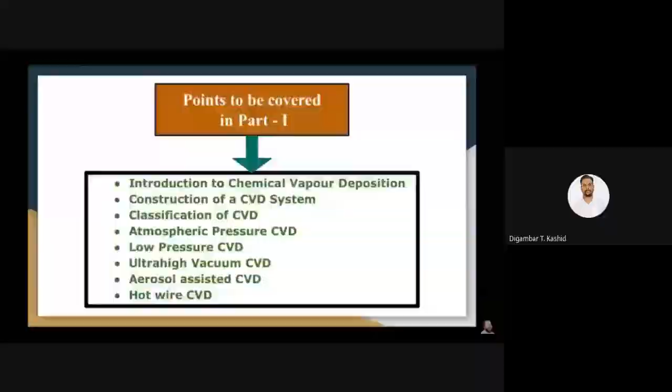So for this topic I have made two parts. In part one we discuss the introduction to chemical vapor deposition process, then construction of the CVD system, classification of the CVD system, and then the types of this CVD system one by one. Let us begin with the first point.

Deposition is deposited from a vacuum, from a vapor, by a chemical reaction occurring on or in the vicinity of a heated substrate. So whatever I explained already in physical vapor deposition, we create certain molecules, atoms, or plasma, and then deposit those onto the substrate. But in chemical vapor deposition we make certain gases or materials which react with the substrate itself to make the coating.

So the resulting solid material is in the form of thin film, powder, or single crystal. We can get the modification by this technique or this way. So what are the key factors in the CVD system?

The first one is substrate material, which we are going to coat or modify. The next factor is substrate temperature: what temperature it can sustain, or what temperature I can put my substrate at so that it will not change any of its properties, physical or chemical.

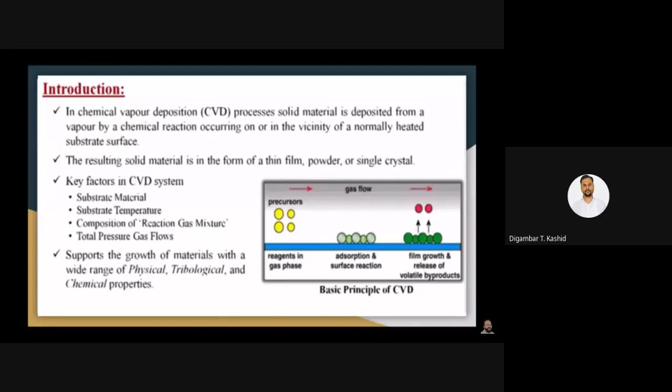From this diagram shown in the slide, we can understand there are certain precursors, which are reagents in gas phase, then the gas flows, then there is adsorption and surface reaction taking place with the substrate itself, and then the film grows on the substrate material, releasing volatile byproducts - maybe some toxic or other gases - which come out from the surface. So we get a uniform material coating onto the top of the surface. This is the general idea about the chemical vapor deposition process.

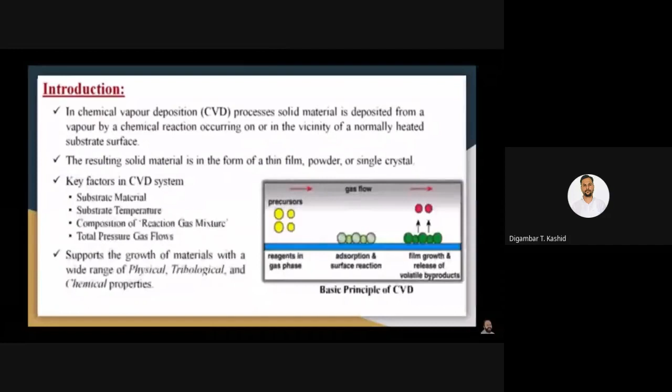Let us move to the construction of the CVD system. What are its parts? First we have the reaction gas dispensing system.

In the diagram I have shown the reaction dispensing system. After the reaction takes place, all the products pass through these channels or dispensing systems, because we have certain flow meters, gas bottles, the sublimator, the generator, and the evaporator.

The thing is that when mixing is taking place, if there is any humidity, it can remove that humidity. If there are impurities, it can subtract those impurities. Not only that, there is a flow meter by which we can control the flow onto the system itself.

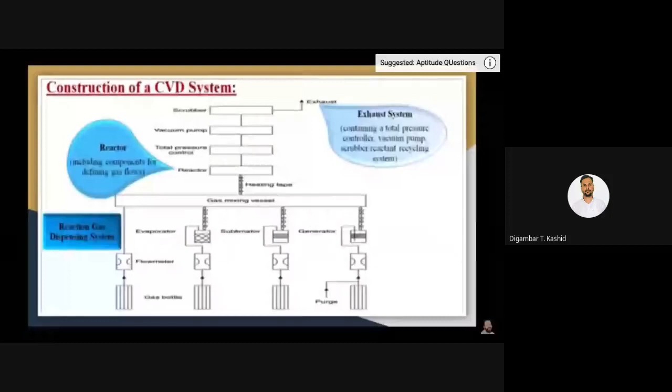We fix it onto the substrate or the system. Then we have some kind of reactor, as shown here, which includes components for defining the different gas flows, so we can put gas into the system and do the mixing automatically. We can control the percentage of gas mixing and agitate the gas as well. Also, at the top we have an exhaust system containing a total pressure controller, vacuum pumps, scrubber, and reactant recycling system.

Whatever impurities, moistures, or other means that are not required for this particular action can be taken out and thrown outside by this exhaust system, as shown here.

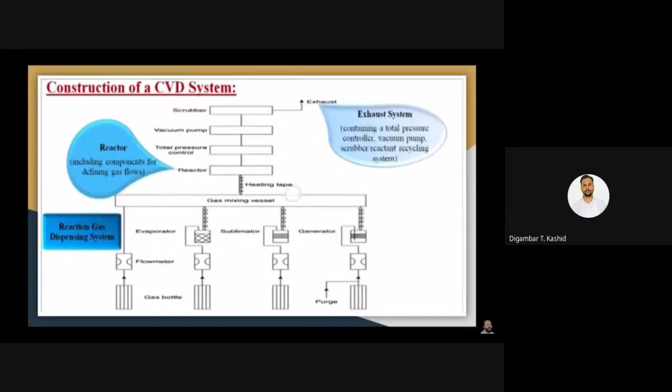Now let us move to the next point, where we discuss the different types of CVD process. These CVD deposition processes are classified according to the following criteria. The first one is energy source and activation.

Look at the energy source and activation types: rapid thermal CVD, in short RTCVD, then hot wire CVD, photo enhanced CVD, laser induced CVD, plasma enhanced CVD, and high density plasma CVD. From this, you can understand that all come under the CVD process, but only the energy source is different. Somewhere we use electrons, somewhere photo or light, and somewhere thermal source.

Next we come to the substrate, which may be non-porous or porous, whatever material we are going to use for doing the modification.

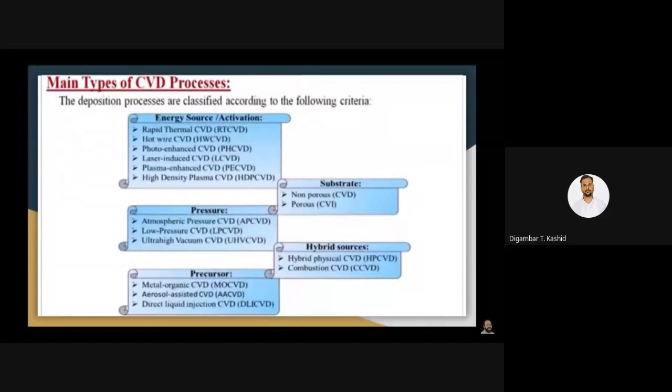So these are the different types of CVD. Let us discuss these types one by one. The first one is called atmospheric pressure CVD, in short APCVD, process at atmospheric pressure. From the name itself, you can understand that we maintain atmospheric pressure for doing this particular CVD process.

The reactor designs provided a high deposition rate, typically at 400 degrees centigrade, giving films in the range of 100, 2000 to 3000 angstrom per minute. That is the controllable limit, and we can go up to 400 degrees centigrade, so if our material is less than that temperature, it works for the substrate.

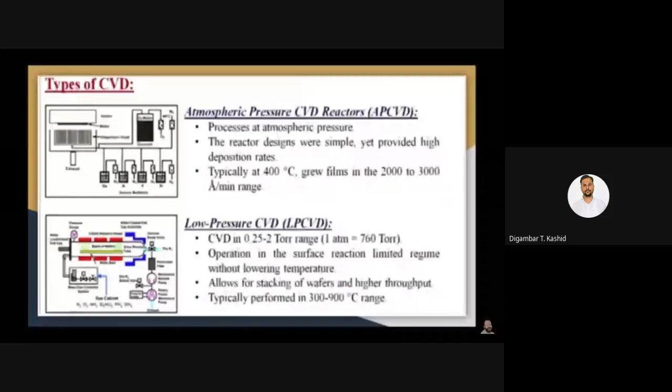The next is called aerosol assisted CVD, or AACVD process. Here precursors are transported to the substrate by means of a liquid or gas aerosol. We are not going to use any kind of carrier gas here, rather it is carried out by some kind of liquid or gas aerosol.

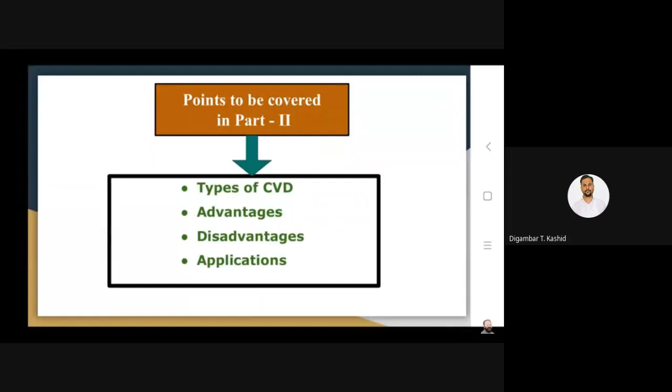Next is photo enhanced CVD, or in short, PHCVD process. It is based on activation of the reactants in the gas or vapor phase by electromagnetic photon energy. The reactant molecules or atoms initiate the process, and low temperature, generally 150 degrees centigrade, is needed to form films like silicon dioxide, which greatly minimizes the...

Then a UV source is used, which emits UV lights, and then we are plunging some kind of carrier gas. That carrier gas reacts with the UV rays, and then they form a certain kind of material, which is then deposited onto the substrate itself.

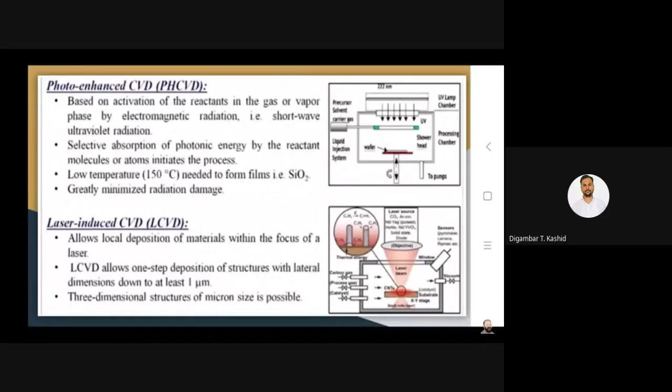You can understand that we have given an example of CNT, carbon nanotube. So any kind of laser source can be taken, which is put in place, and there are several inlet channels where we are plunging the carrier gas and different gases with which we can react properly. Through this laser, these gases will be agitated, and they will form a certain kind of new material which will be deposited onto that carbon nanotube.

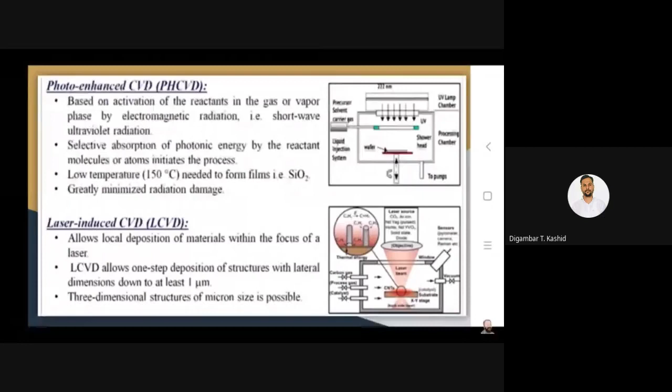Now let us go to the next one, direct liquid injection CVD. Here, liquid or solid dissolved in a convenient solvent liquid solution is injected in a vaporization chamber toward the injectors, typically like a car injector. Then the precursor's vapors are transported to the substrate using a classical CVD process.

The simple idea is that a car injector is nothing but where the fuel is directly coming and injected into the engine itself. So we are using a certain kind of injector there, continuously injecting the oil and air mixture and continuously burning it. The same thing we are doing here also.

So we have some kind of pressure tanks where we put a certain gas pressure. Due to that gas pressure, the liquid goes into the atomization process, or generally we call it an atomizer. There, a high pressure of air is given, due to which the liquid forms small bubbles, and then those small bubbles directly become a vapor, which is deposited onto the metal surface, and the rest of the vapor goes throughout the chamber.

Now let us discuss the next one, metal organic chemical vapor deposition. It is based on metal organic precursors used to produce single or polycrystalline thin films, a highly complex process for growing crystalline layers. Pressure is generally 10 to 760 torr, and this technique is preferred for thermodynamically metastable alloys. Here we generally use certain metal precursors, and we need a high energy source. Then the material we are going to deposit is shown in the figure also.

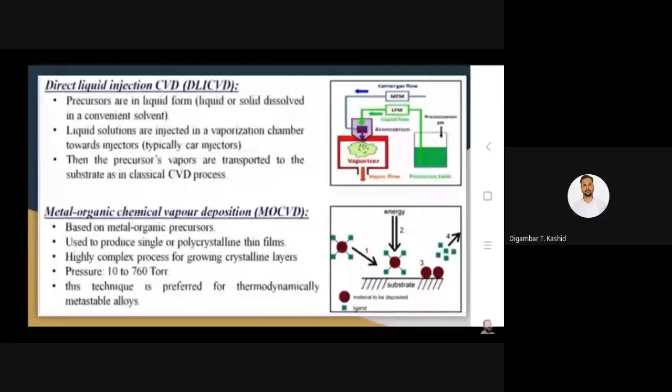Let us start the technology, that is CVI, chemical vapor infiltration. This is the latest technology. CVI means the chemical vapor infiltration is a ceramic engineering process whereby matrix material is infiltrated into fibrous preforms by use of reactive gases at elevated temperature to form a fiber reinforced composite. So not only can you do coating of a particular material, you can do coating of particular composites too. The earliest use of CVI was the infiltration of the fibrous alumina with chromium carbide. CVI can be applied to production of carbon-carbon composite and ceramic matrix composite.

A similar technique is the chemical vapor deposition process. The main difference between CVD and CVI is that in CVD process, hot bulk surface is used, while in CVI deposition process, a porous substrate is used. So that is the basic difference.

From this particular case, you can understand that at the inlet we are putting the chemical carrier gas and the reactant material. Then the carrier gas is going through this fibrous material, and the molecules react inside, and some molecules along with carrier gas go out. That means the carrier gas can easily go inside the porous material, and the molecules of that reactant material can be absorbed inside the pore itself. Some molecules may come out with the carrier gas. So this is how we do the CVI infiltration process.

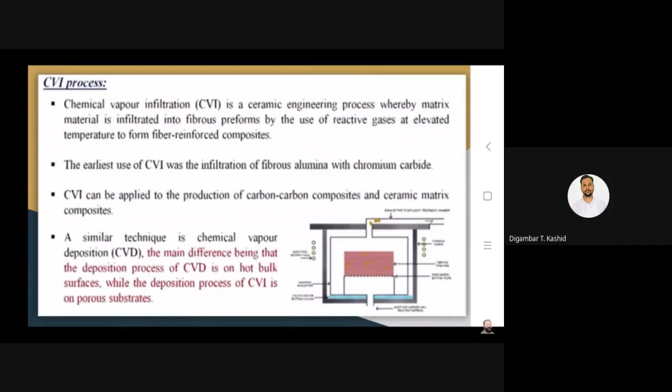Here we are doing the infiltration of particular molecules inside the material.

Now next, hybrid physical CVD process. This vaporization process involves both chemical decomposition of precursor gas and vaporization of solid source. The main difference between HPCVD and other CVD is that in the heating unit, both substrate and solid metal source are heated up by the heating module.

Now, rapid thermal CVD process. This only heats the substrate rather than the gas, which helps reduce the gas phase reactions, and that can lead to particle formation. So far we were agitating the reactant material and the gases. In this particular case, the substrate itself becomes reactive, so that it can react directly with the gases and form any kind of layer, powder, or coating onto it.

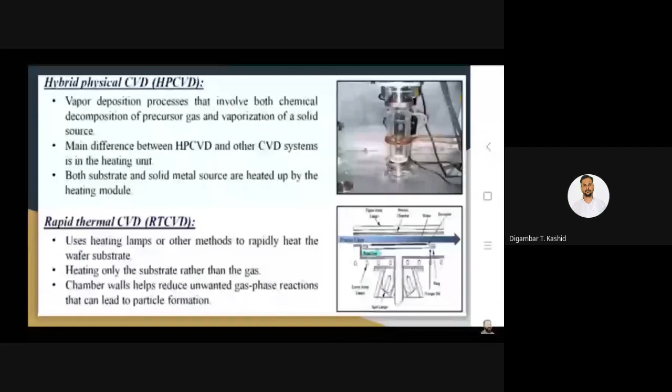That is the plasma CVD process. This is also a latest technology, and this equipment is very expensive. LPCVD with plasma source supplies energy to the reactant gas, and we have to keep lower deposition temperature around 200 to 350 degrees Celsius, which is good for films more sensitive to temperature. So this is all about the plasma enhanced CVD process.

Let us discuss the next one, called high density plasma CVD - plasma enhanced CVD with very high density plasma. The density of plasma is more, with RF bias on substrate. It has a lower deposition temperature, generally 20 to 150 degrees centigrade, much lower pressure, generally 1 to 10 mTorr required, and gives better quality films with fewer defects. So this is a more sophisticated machine than the plasma enhanced process.

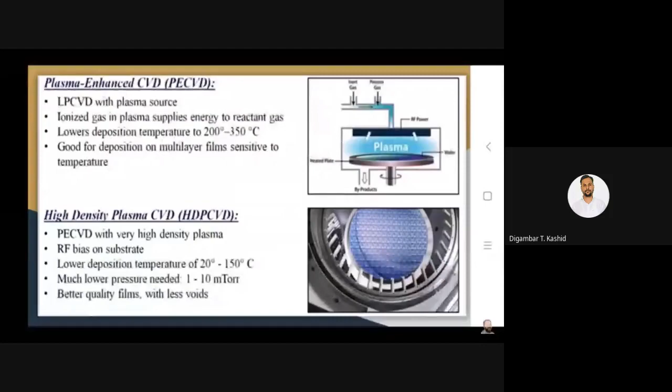The next one we are going to discuss is combustion CVD, or CCVD process. This is divided into 4 parts. It has the ability to produce thin film in the open atmosphere using vapor precursors, or inexpensive precursor chemicals in solution. Generally, like painting, we use this kind of technique.

First one is called solution preparation. This is the first step, starting with precursor of metals dissolved in a suitable aqueous or organic solvent. So here we are putting the solution, and this solution is pumped into a particular nanomizer or gun, which is going to spread the material onto the surface itself.

Then in the meantime, we use a certain kind of filter, because there may be some impurities, some humidity, or certain water molecules that can be absorbed directly, so that the solution in dry form will go directly to the nanomizer. And in this particular case, we are doing the atomization of that particular gas - what is called atomization, or atomizing gas.

The solution is delivered by means of a pump to a proprietary atomizer where it is converted into submicron droplets. Here we are giving high pressure gases, so through these gases, these solutions in liquid form are coming into small bubble form, and then directly through this film structure, giving certain kinds of combustion at that particular junction, and then that film is falling onto the substrate making a certain kind of coating over there.

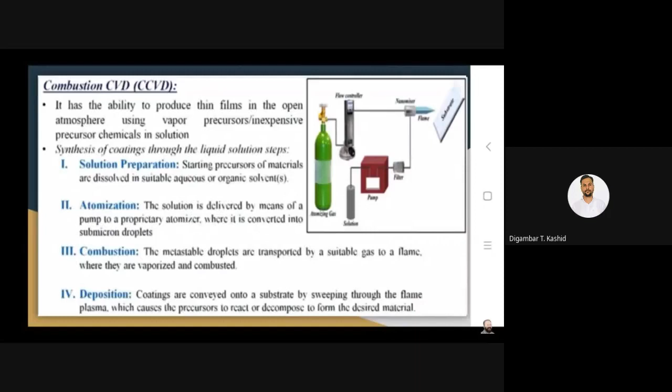Now we are going to discuss what are the considerable factors for selecting suitable CVD.

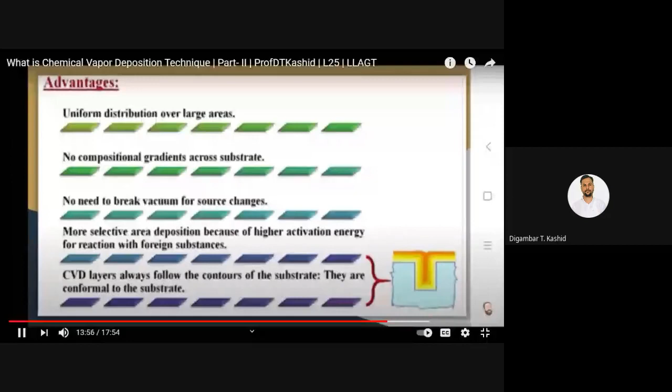Always follow the substrate - they conform to the substrate itself. So that's all about advantages of the CVD process. Let's discuss the disadvantages.

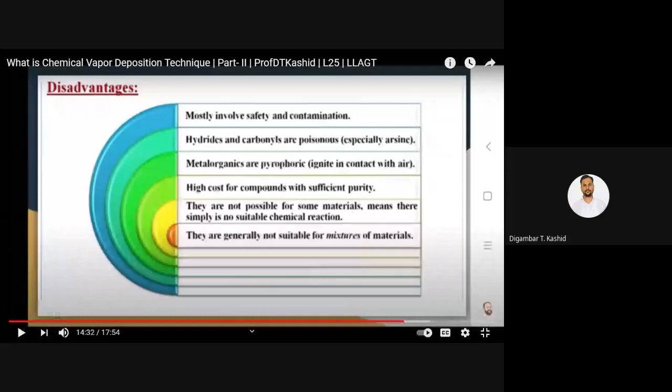First one is the most involved safety and contamination issue - that is a big problem over there. It can contaminate with the source, it can contaminate with the material, it can contaminate the equipment.

Then next, hydrides and carbonyls are poisonous. Then metal organics are pyrophoric - they ignite in contact with air. Then there is high cost for compounds with sufficient purity. Then they are not possible for some materials, meaning there simply is no suitable chemical reaction, and they are generally not suitable for mixtures of materials. So these are some disadvantages.

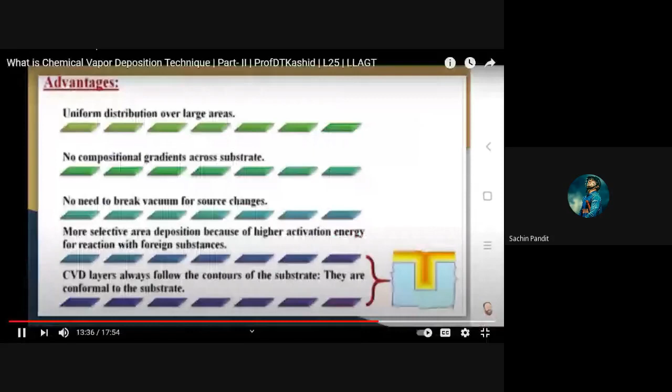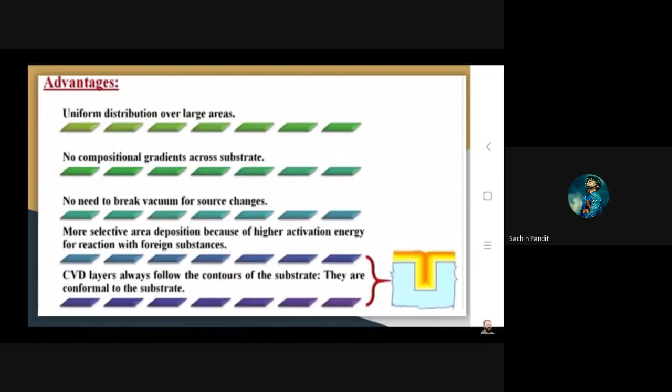What are the advantages? First is uniform distribution over large areas. Then no compositional gradients across substrate. Then no need to break vacuum for source changes. Then more selective deposition because of higher activation energy for reaction with foreign substances. CVD layers always follow the contour of the substrate - they are conformal to the substrate.

It mostly involves safety and contamination issues - that is a big problem over there. It can contaminate with the source, it can contaminate with the material, it can contaminate the equipment. Then next, hydrides and carbonyls are...

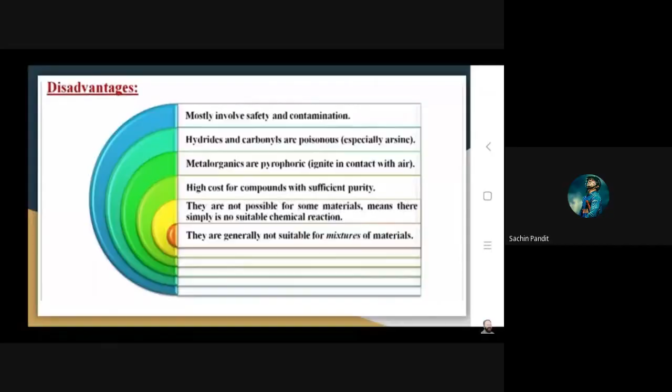...chemical reaction, and they are generally not suitable for mixtures of material.

Of CVD technique, generally we are going to use it for microelectronics purposes - conductors, passivation layers, diffusion barriers, oxidation barriers, etc. Semiconductor lasers, optical fibers for telecommunication. Then optical fibers are produced by coating the inside of a fused silica tube with oxides of silicon.

Then we are using it for solar energy purposes also - solar energy conversion by the utilization of selective absorbers and thin film solar cells of silicon and gallium arsenide, and dye sensitized solar cells also. Then carbon nanotubes for advanced electronics purposes, biological and chemical devices and detectors also.

Then wear resistance coatings have wide industry applications - coatings of titanium carbide, titanium nitride and alumina on cemented carbide cutting tool inserts.

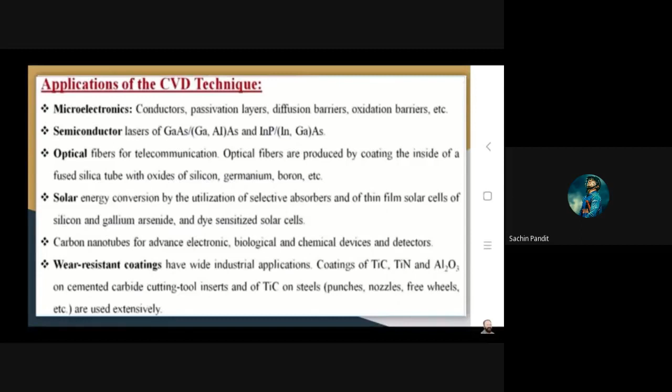For fiber reinforcement material, then structural shapes. Again you can use it for decorative coatings - for example titanium nitride, or you can say for gold plating or gold coloring on watches.

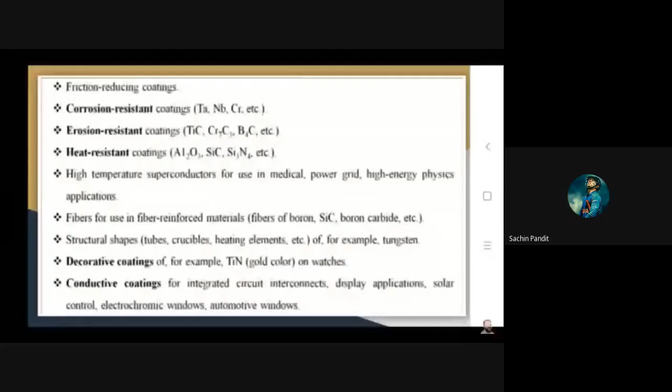Again for conductive coatings for integrated circuit interconnects, display applications, solar control, electrochromic windows, automotive windows. So for all these applications you can use this technique. So here I have given some summary about this - this is about our today's lecture.